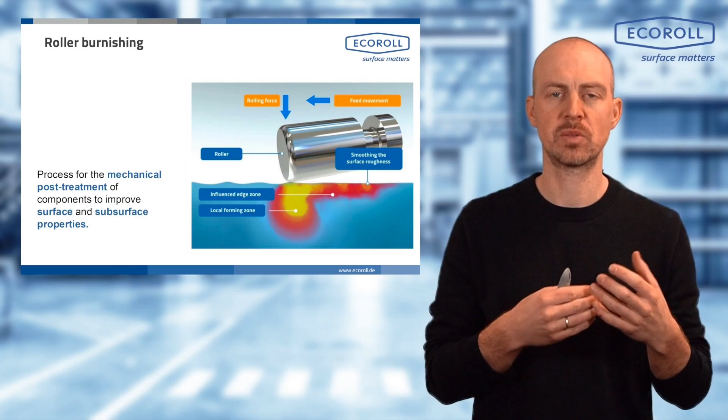You know which lathe tool or milling cutter to use for which machining geometry, which task you can handle with which cutting material, and you can request and order the right tool from your supplier. With burnishing tools, this experience is often lacking. Burnishing tools are not as well known. Therefore, we want to provide you with a tool in 3 simple steps to help you find the right tool for your needs.

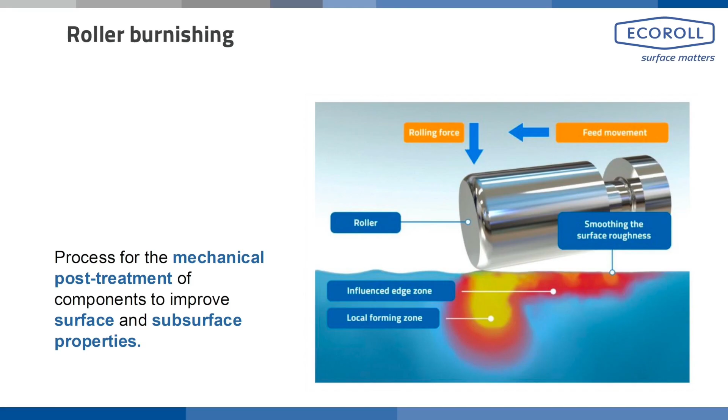Basically, we distinguish between single roller mechanical and multi-roller mechanical tools, which are grouped as mechanical tools, and hydrostatic tools with and without a following system. Each tool has its own advantages and disadvantages. Their properties are somewhat different. I don't want to go into detail about that, but it's important that these different types of tools exist.

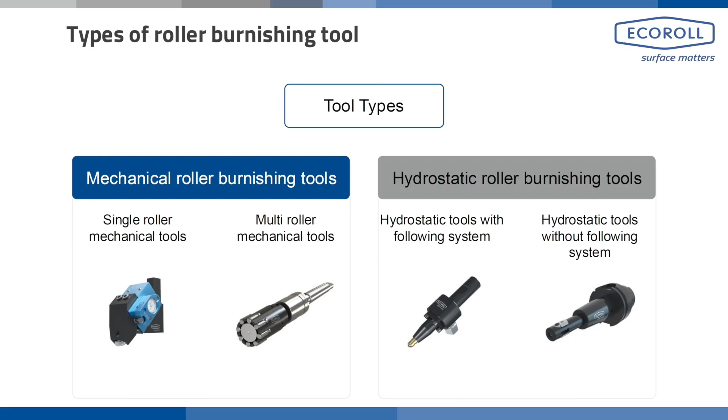With mechanical tools, a rolling roller is pressed into the surface via a mechanical force. This force can be generated in many different ways. It can be directly via the machine, via spring elements, or via servo motors. It doesn't matter at all. A mechanical force is applied.

With hydrostatic tools, a rolling ball is pressed into the surface with a defined pressure. The ball is completely surrounded by a medium on half its surface and is, so to speak, hydrostatically supported in this medium. That's why they're called hydrostatic tools. The rolling pressure here is up to 400, sometimes even 600 bar, with which the ball is then pressed into the surface.

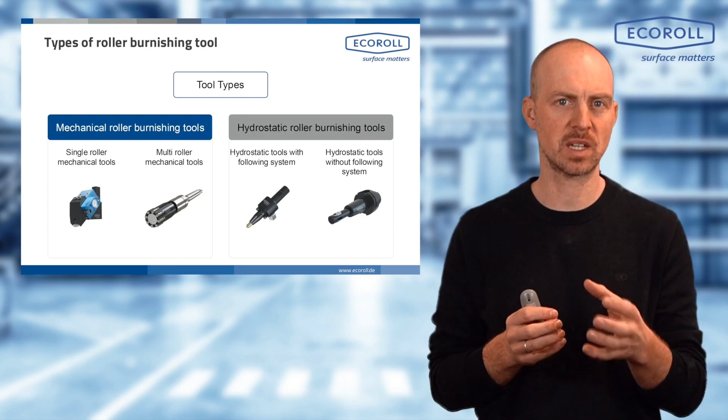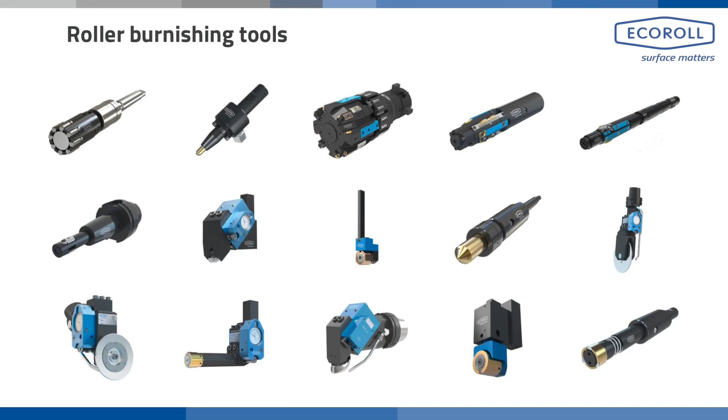If you, as a user, want to find the right tool now, you have a variety of options. Here is simply a representation of a few tools that we have in our portfolio. You see standard tools here, but you also see special tools that we have co-developed and adapted for customers. How are you supposed to find the right tool here without any potential experience in deep rolling or smooth burnishing? It's not that simple. Therefore, as I said, we have a 3-step framework that guides you step by step, allowing you to define the right tool for your needs at the end.

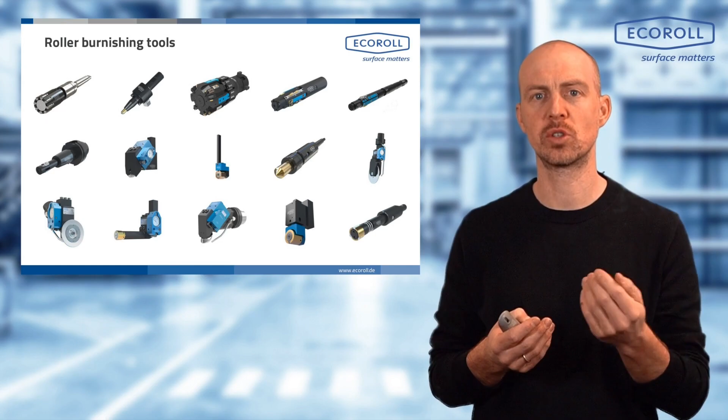To start with, of course, we first have to define the boundary conditions. So how and where do you want to use the tool? You need to know which machine you are using. How is the tool clamped into the machine? How does the tool need to be aligned? How heavy can the tool be? How large can the tool be? All of these are questions that are defined by the machine.

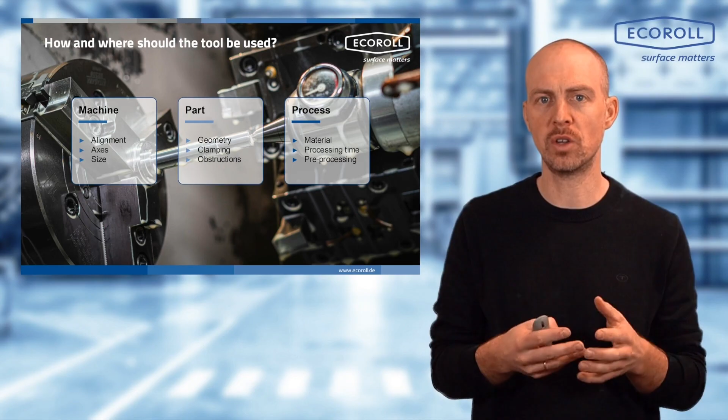The workpiece itself defines, of course, the basic geometry of the roller, the rolling element. Are there any interfering geometries that we need to consider? How is the workpiece clamped? All of these are questions that you have to answer here. And thirdly, we have the process, of course. So which material do we want to machine? How fast does the process need to be? How strong does the rolling force need to be that is applied? All of these are questions we need to look at when considering the process.

When you start selecting the right tool, the very first question you should ask yourself is what you want to do. So what is the goal of the machining process? Why do you want to use this method? Do you want to smooth a surface? Do you want to deep roll a surface? Or do you want to perform a special case? Do you want to create a precision bore?

We differentiate so significantly between these two processes, roller burnishing and deep rolling, because the processes place different requirements on the tools. Roller burnishing is only about smoothing a surface. This is very easily done and can also be checked afterwards. No special process control is necessary here, no documentation, no additional measurement technology.

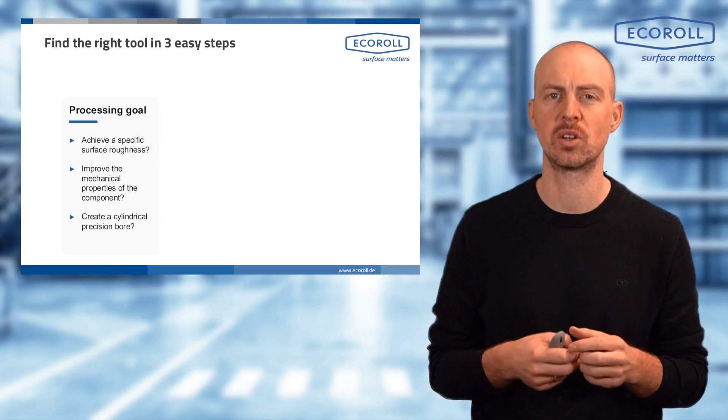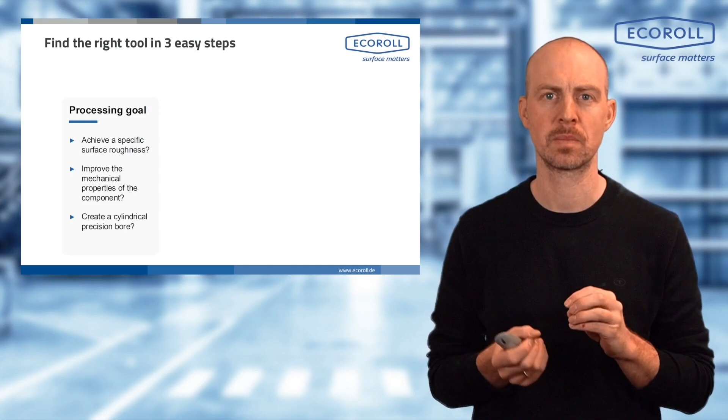With deep rolling, it's a bit different. In deep rolling, the rolling force is a very central process variable that determines the amount of hardening in the surface layer. The problem is you can't measure that non-destructively afterwards. Therefore, we have to place higher requirements on the documentation and the adjustability of the rolling force. And therefore, the tools for roller burnishing and deep rolling are slightly different in their requirements. That's why we have to clearly distinguish here whether we want to burnish a surface or even deep roll it.

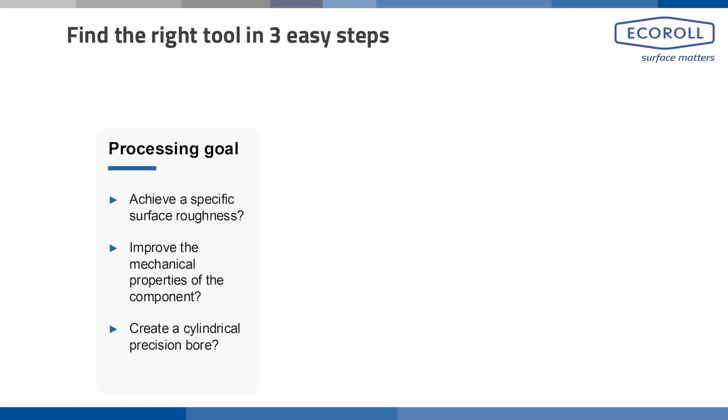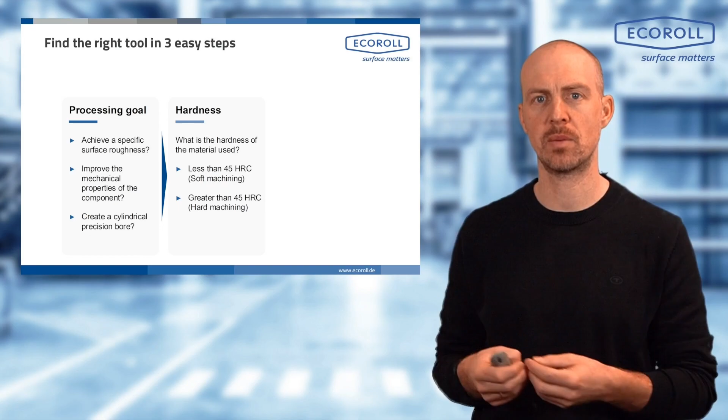The second question is relatively easy to answer. What is the hardness of your material? Are we talking about soft machining? So do we have less than 45 HRC? Or are we talking about hard machining and we have more than 45 HRC? Of course, there is a higher load on the tools during hard machining, which is why we also have to place higher demands on the tools here.

And thirdly, the crucial question: which geometry do you want to machine? What is the basic geometry of the component you want to machine? So do you want to burnish a cylindrical surface? Do you want to deep roll a radius? All of these are questions or geometric shapes that you have to define.

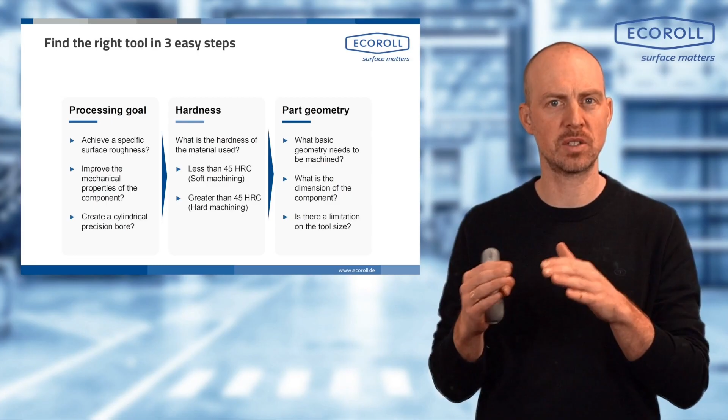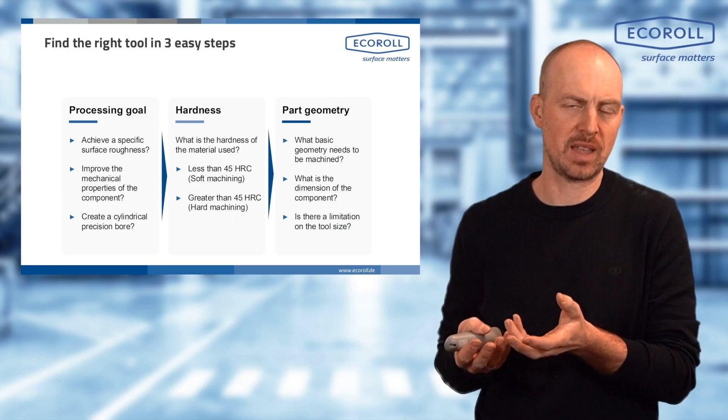It's not about what the overall component looks like. So, of course, behind your cylindrical surface that you want to machine, you probably have a shoulder with a radius. But if that's not relevant, then you don't need to consider it, unless we have some interfering geometries or something like that. But those are detailed questions. To select the right tool first, it's crucial to know what basic geometry you have.

We have a list here of various icons, and these icons describe different geometric shapes. So we have cylindrical surfaces, we have cylindrical bores, we have a cone, we have a taper. So we have various basic geometric shapes here, and these icons can be found in all our brochures, on our website, in the tool descriptions. So basically, you'll find these icon shapes everywhere and can clearly say this tool is suitable for this machining process, or it isn't.

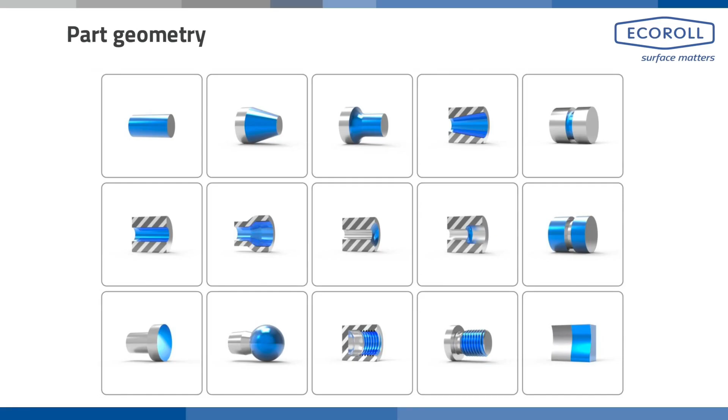And to make this whole thing even easier for you, we recently launched the tool finder on our website. The tool finder is basically what I've briefly summarized for you in these 3 steps as software on the website. You can find your correct tools directly here by answering these 3 questions. If you do this, as we're about to do, you'll get a list of tools at the end that are relevant to your application. And so you can see how it works, I'd like to demonstrate it to you live.

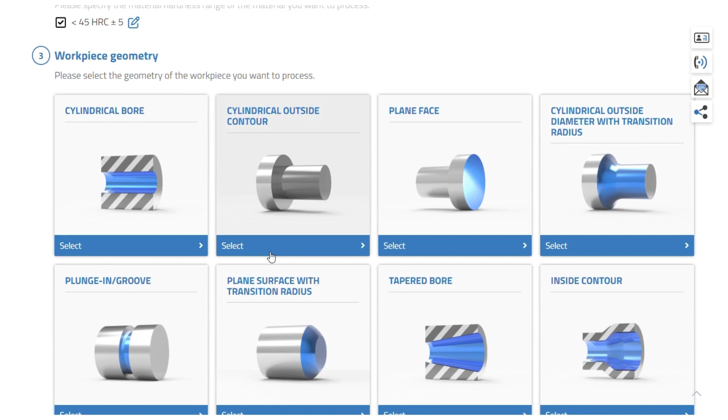And then in the third step comes the selection of the various component geometries. Here you can see in color what kind of basic component geometry your part currently has. Select that and then proceed to the tool selection. For the example itself, let's assume a cylindrical outer contour. And then the corresponding tools are displayed below that with a corresponding list. All tools that basically meet these requirements are listed here.